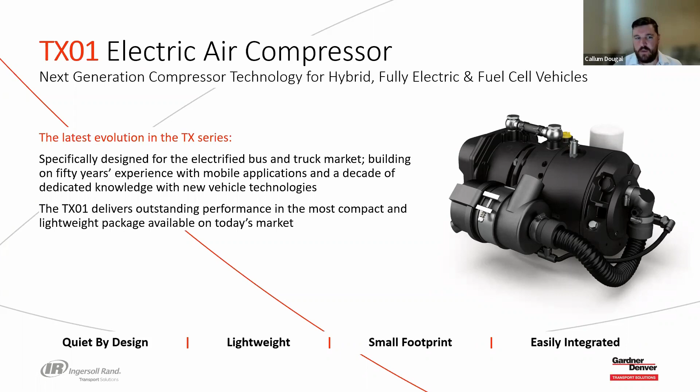So if we move on then to an introductory slide for the TX01, and then we'll pick up some of the critical vehicle improvements to the package we've made. We've really targeted the lower flow rates and duty cycle capabilities with this package, and the new combined inverter and motor drive technology pairs well with our proven rotary vane technology, meaning that we give you the full package for your vehicle needs. So going down through the bullet points, one of the first things we've done is increase the speed range of this product.

So we've got now a 20% larger flow range, which means we can hit the high flows that we need, as well as getting down to the low flows, which then pairs us with the lower duty cycle capabilities, which has been one of the things we've really targeted with this new TX01 product. So as standard, we can go as low as 10% duty cycles now to align with the air demands on the system. And we have strategies to help you get to that low target with the environmental conditions that we know are a challenge within the vehicle industry.

Some of the vehicle critical requirements we know are low emissions and weight and space. So we've done some further reduction in the noise emissions compared to the TX02 product itself, and the airborne noise and improvements to the structure-borne NVH is something we've targeted on this product. We'll talk a little bit more about that in some of the later slides.

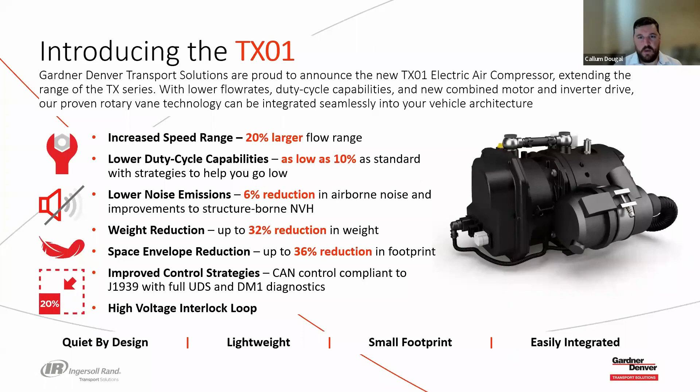So if you move to the next slide then, if we talk a little bit more about these new features, so the low duty cycle capabilities: as we've said, the TX01 has specifically been designed for duty cycles to get as low as 10% running. So that's 10% of a 10-minute cycle.

The larger speed range that we talked about allows us to still hit those high flow pump up requirement times for things like the Reg 13 legal time limits, but it also allows us to get those low flows so we can achieve the on-road tank fill requirements that we see in the real world when you only need to fill those tanks.

To ensure that we can do those duty cycles across the larger environmental envelope that we know is critical for the commercial vehicle market now, from the -40-degree area right up into the high 60s, we've made some improvements to the minimum pressure valve, the MPV, which we'll talk about in some further slides. And we've introduced two new features to the strategy for low temperature running.

So we've got a recirculation valve on the product now as a mechanical feature that helps us with the low temperature running. And we've also introduced a software feature, the minimum runtime feature, for some safety critical low temperature running zones.

For the lower noise emissions, we've optimized through design the internal geometry of our rotary vane compressor, the RSU geometry. And through testing, we have ensured that the free field airborne noise emissions are below 69 dBA at 1 meter across the full operating range. So that's at the highest speeds. In the recirculation mode, we're below the 69. And I believe if we go all the way down to the low speed end, we're under 59 dBA at that 1 meter distance.

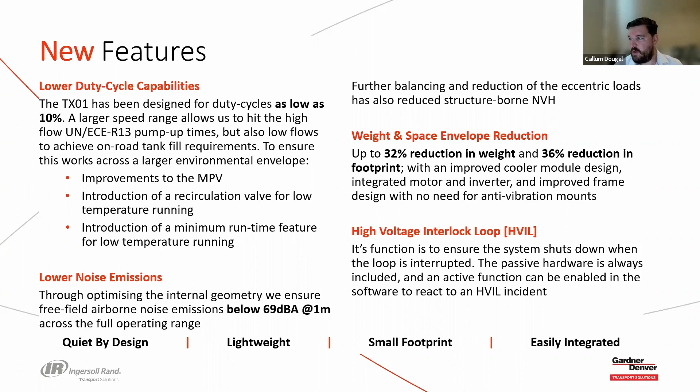And then lastly on this slide, we've got the high voltage interlock loop. So I'm sure a lot of you are aware of the HVIL systems. Its function is obviously to ensure that the system shuts down if there's any interruption to the high voltage circuitry. This is a fundamental safety concern on the vehicles. The passive hardware for this is already included in every package we sell. So the wiring within the high voltage and low voltage connectors is there.

And then an active function can be enabled through the software if indeed you do want something to react to an HVIL incident. And that's something that we can, through partnership with you, build into your operation strategy and our control logic of the compressor.

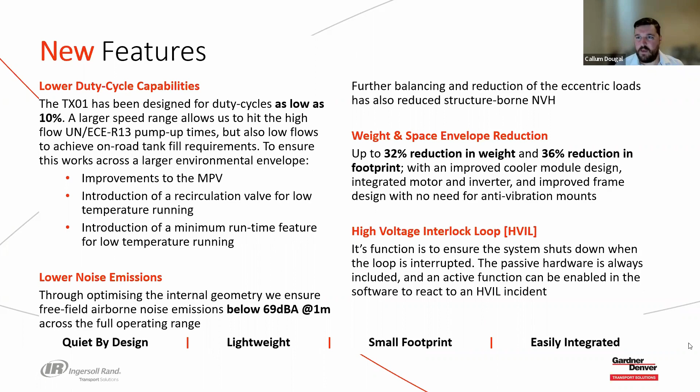So moving on a bit more onto the actual mechanical functionality of the improvements we've been talking about there. So we talked about the minimum pressure valve. So if we talk about the basic functions of the compressor, you've got an intake valve that opens to draw air into the compressor. The compressor obviously compresses. And then we have what we term the minimum pressure valve on the discharge, which is our controlling valve on the discharge line of the compressor.

So our minimum pressure valve now starts to open at a higher pressure, which ensures we're optimizing our oil management for the system. And the non-return function of that is now improved with a pressure feed to also isolate that for a stopped compressor. So that will allow us to react a lot quicker to things like dryer purges and other downstream equipment to ensure that we have that optimized oil management.

The two new functions we talked about, the recirculation valve, this has been introduced to, as we said, combat potential condensation issues at low temperatures and low duty cycle operations. So this allows us to recirculate a portion of the warm air to keep that inside the compressor so that we can remain hot in those offload conditions from the vehicle air system. This allows us to combat those potential condensation issues that we know compressors can fall susceptible to in those low temperature, low duty cycle operations.

And in combination with this recirculation valve, as I said, we have the minimum runtime feature, which is built into the software. So at specific low temperature conditions, the unit then maintains a low speed run on, and this ensures that the internal temperatures do not fall below those critical limits. So we pair the minimum runtime feature with the recirculation valve, and that allows us to handle those larger environmental envelope conditions that we're seeing as part of the vehicle requirements now.

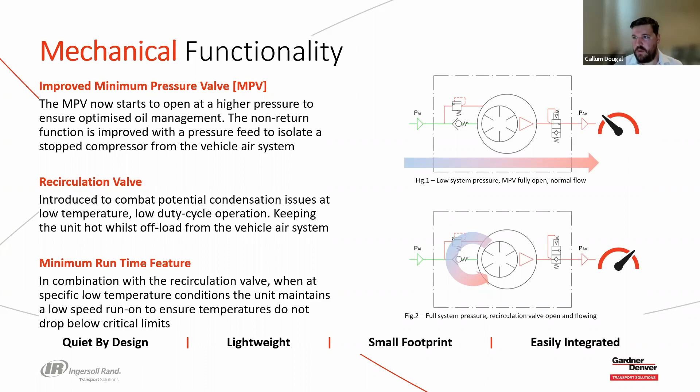If we move on to the next slide then, we'll talk a little bit about the software functionality. So we've improved the control strategies on the TX01 product. As I said, we're fully compliant to J1939 for the CAN protocol, and it now comes with the full UDS and DM1 diagnostics.

Our 2 primary control modes we have as standard, as you'd be familiar with on the TX02 units, a speed control, which is a speed signal sent via CAN to request the compressor to run. This is within the speed range limits that we'll be familiar with on the DBC files. And then the compressor will operate at the set speed given by that CAN signal. Then a signal of 0 will be sent to stop the compressor, and that's some very simple speed control settings there, although obviously we can talk more about operation strategies with you as we partner with you to determine exactly what's appropriate for your vehicle systems.

But the system can now also be configured to react to pressure readings over the CAN network as well. So if we define cut-in and cut-out pressures, which are fully user-definable within the software, we can work with a pressure signal readout on the CAN system to cut in and cut out the compressor purely based on the pressure of the vehicle system itself. So that allows for a slightly more autonomous control, and it will react directly to your vehicle tank systems.

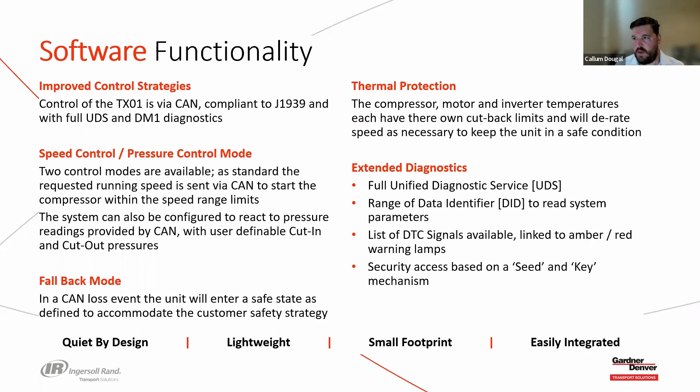If we move now slightly more onto the technical data, we've got a graph here, and this is showing where the TX01 sits in terms of the TX series. So if we see the dotted lines on here, we have where the TX02 flow currently sits. So we're going across up to around a 3,000, 3,100 RPM speed. We get up to around 450 litres on the TX02 unit.

We're bringing the TX01 underneath that now so that we're dropping down, and at the bottom end, you can see we get really beneath that 150 litre a minute limit, which allows us, as we said, along with the duty cycle capabilities, to really target the flow you need on the road as you need it. You can see there that we have extended the range, so up to the 3,500 to get the top end on the TX01 flow. So again, that allows us to hit those legal pump-up time requirements as well, so that we can cover the full range with the one product.

And as you'd expect, you can see the drop in the actual power take from the new TX01 units when compared to the TX02, purely based on the fact that we're delivering less flow, and that, as you can see, matches entirely and tracks with the TX02 units.

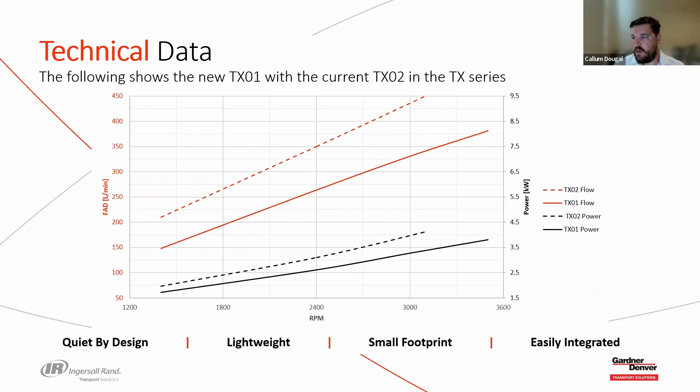The next slide then is a little bit of a breakdown of some of those key mechanical, environmental, and electrical data points. I will point out at this point that the data sheet and the launch flyer that will be sent out to you as part of the launch pack will include all of these details. And in fact, this presentation will be included in that launch pack as well.

So if we look at some of the key mechanical data points for the new TX01 product, we've said duty cycles from as low as 10%, but we can still hit that 100% requirement. So we can do continuous run if necessary on the vehicles. The operating pressure range is anywhere from 7 bar up to 12.5 bar as standard. That's to do with the sizing of our recirculation valve.

We can go to pressures up to about 13.5 bar if necessary. We just need to discuss the recirculation valve at that point, and it might have to come down to some sort of customer bespoke unit at that point, but that is something that we can accommodate.

The operating free air delivery, matching with the operating speed range, so from 1400 RPM to 3500 RPM gives us the 160 to 380 litres that we'd see at a 10 bar discharge. That will slightly lower and raise depending on the discharge pressure, but all of that information will be available to you.

The weight, as we said, including all the framework, all of the intake filtration, the upstream equipment that is necessary for the compressor, is around 41 kilos. That's including the wet weight. So we're talking the onboard coolant that's going through the system as well, and the oil in the system.

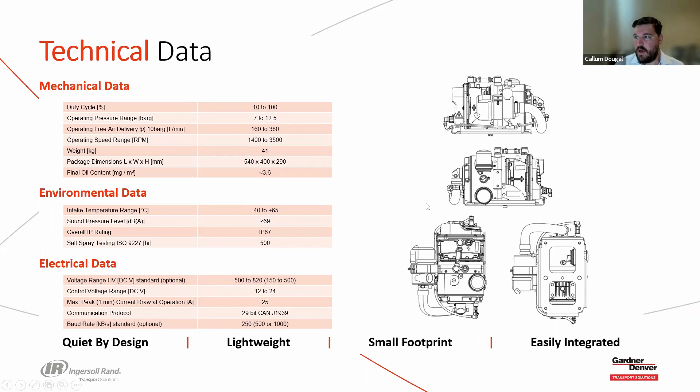The last two slides then, we'd like to talk a little bit about some of the testing methods and specifications. So the TX01 units have completed all of their testing. That's why we're now at the launch phase. So we have done a range of testing. It's not limited to what's on the screen at all. There's a full suite of testing and DVP that we've been doing as part of our validation program. But some of the key highlights we'd like to mention here at the launch are as follows.

So we've done the full pressure range and flow range performance mapping as you require. And that information can then be shared with you to make sure that we have the appropriate set points as part of your vehicle operation strategies. We've done full ambient temperature range mapping, from -40 all the way up to +65 for the intake. We've done that at a third-party environmental chamber facility. And during that, we've tested all the duty cycles from 10% up to 100%, and we've validated through physical testing that range of the product.

For our life endurance testing, we've completed our internal 30,000 stop-start cycles, which we have finished and continue to do to go further than we need to. We've already validated it, but we're keeping it going to keep our endurance testing data up to date. And we have got the 2,000 hours as a minimum on-load testing as well. And again, we have machines going further than that just for our own interest and to make sure that we are continuing to understand exactly how this product is working in the field.

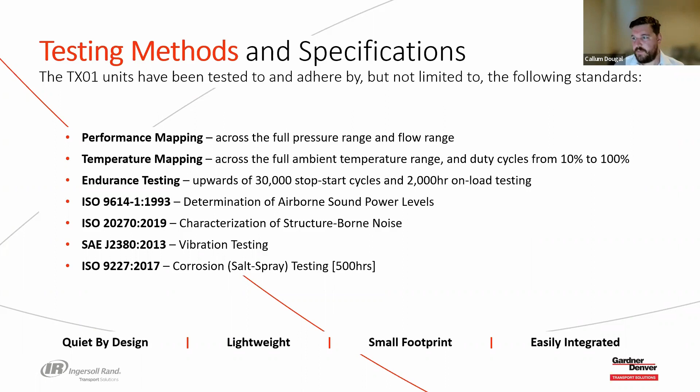And then lastly, the quality certificates and standards. So in terms of the facilities at Redditch where the units are built, the units are built and adhere to the Machinery Directive for CE marking, and now with the UKCA marking that's required in the UK, the Supply of Machinery (Safety) Regulations. So those two we're fully compliant with, and we have all the documentation to back that up, and it becomes part of the certification that comes with the machine.

The electrical drive, the combined motor inverter drive, and the electrics have all been designed and tested to the R100 reg, the ECE Reg 100 on electric vehicle construction and safety. And we have tested and passed the EMC Reg 10 requirements. We are just pending the VCA approval on that to allow us to e-mark the product going forward with the correct e-mark serial numbers.

And then as a business in Redditch, we are ISO 9001 accredited for our quality management systems, but also we are IATF 16949 accredited and have been for the last 3 years now. So that's the quality management system controlling our production line and all of our processes.

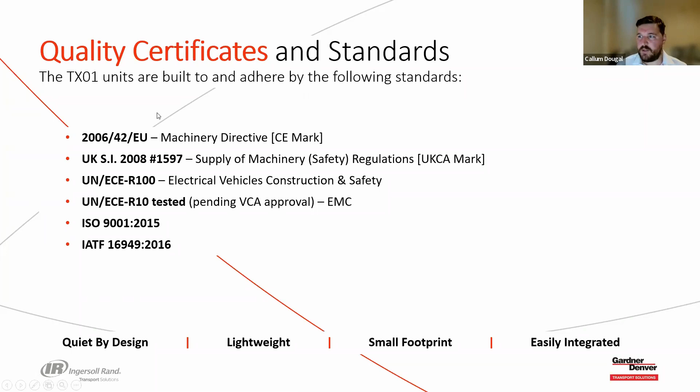And we will now move on to a Q&A session. So, let me get the Q&As up. One of the Q&As then.

So will the product be available with an R10 ECE certificate? Good question. Thank you very much. So yes, we're going through the approvals process with the VCA, and that's on our standard, what will be the G11 package, which is what will be brought to you through the launch pack information. I'm not entirely sure on the timings on that, but we will be able to provide a Reg 10 certificate at some point before the major deliveries we'll be doing next year.

Okay, so we've got a question here then on delivery time. Deliveries, like everyone, we've been dealing with part shortages and challenges within our supply chain, but despite that, we are already in small batch production for some prototype vehicles. And with our robust forecasting system and working with our suppliers, we are now accepting orders for TX01 units, and deliveries will be scheduled for Q1 of 2023. So we are taking orders now, but deliveries will be starting from Q1 2023.